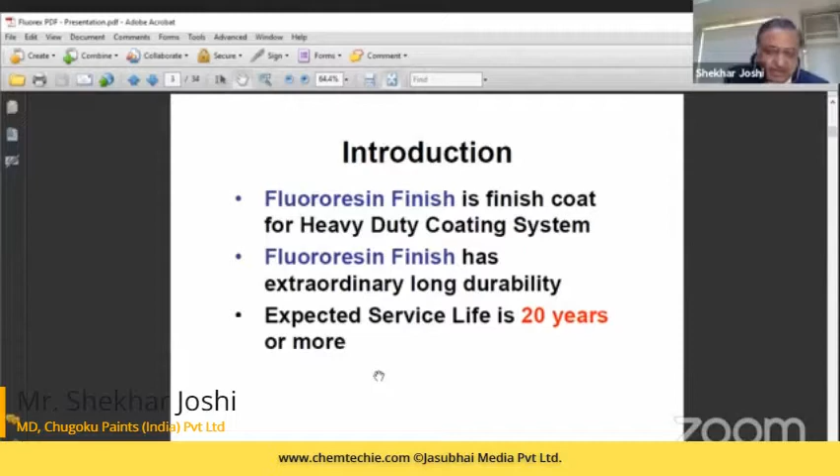So the fluororesin paint system is quite defined, and also quite different from the polysiloxane system, which can have a life of around, I can say, 10 to 12 years, whereas we can expect a life in fluororesin paint finish of around 20 or 30 years. So it has extraordinary durability, which is one of the important factors in fluororesin finish. So what is the specialty?

The specialty is excellent durability, physically very strong, decontamination property, and good application. It's very easy to apply, because you can apply by brush or by normal airless spray. There are no issues as far as painting application is concerned. We may feel this kind of system can be a difficult one, but it's not at all.

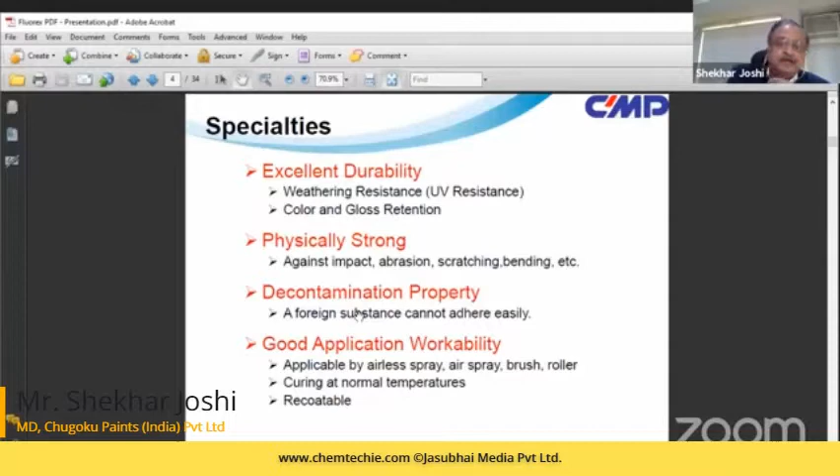And excellent durability is basically this: all the paints, say the epoxy paints, get chalky, while polyurethane paint has its own limitation of life. But here, if you see the FEVE resin, that is fluoroethylene vinyl ether resin, it is basically a resin which UV rays cannot penetrate to the substrate.

All these documents and pictures I'm showing are also available on Google, and we have picked them up from there; it is not something created by Shekhar Joshi only. Let me give my background. I am not from the chemistry side, I am from the finance side, and due to Mr. KL Batra, sir, I came into sales and now sell marine paints and industrial paints.

So if you ask me any question on chemistry, I'm very sorry, I can just get it in writing and then come back to you. But if you ask me anything different, yes, I can answer, but not on the chemistry part. So let me be very clear at the beginning of the presentation.

So this is basically what we're talking about, the fluoroethylene vinyl ether resin, that is called FEVE resin, which, as in the picture, UV rays cannot penetrate because of its kJ/mol. Because the bond which is there is around 424 kJ/mol, whereas the UV rays are around 411 kJ/mol.

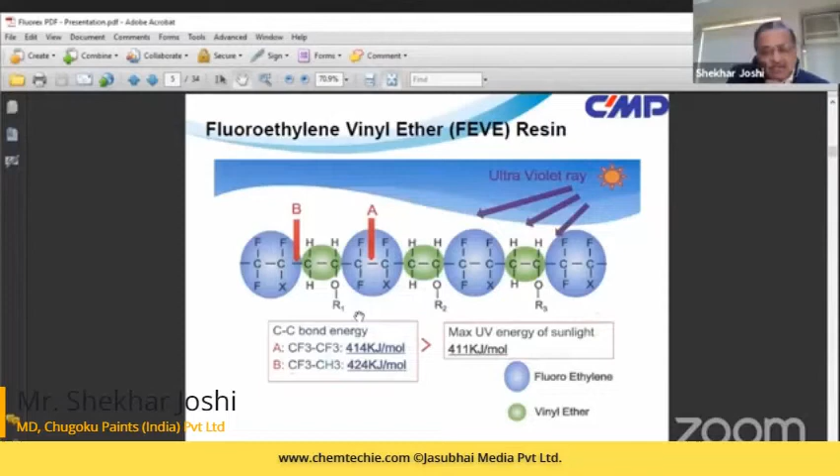Structure formula. This is the structure formula of the FEVE resin, which is a combination of fluorine and carbon. Basically, the fluorine and carbon bond becomes so tough that UV rays cannot penetrate it, and that is how we showed you in an earlier slide how the fluororesin finish paints can be different due to durability, solubility, and also cross-linking ability and adhesiveness.

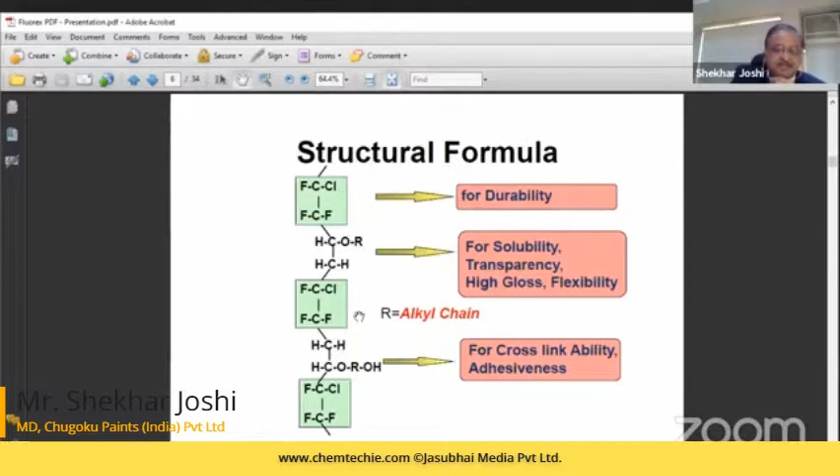So this makes the product different from the epoxy resin, polysiloxane and polyurethane finish. So that makes the product different, and it can enhance the life of the assets at the same time. So our product name is Fluorex, the fluororesin finish paint is called Fluorex.

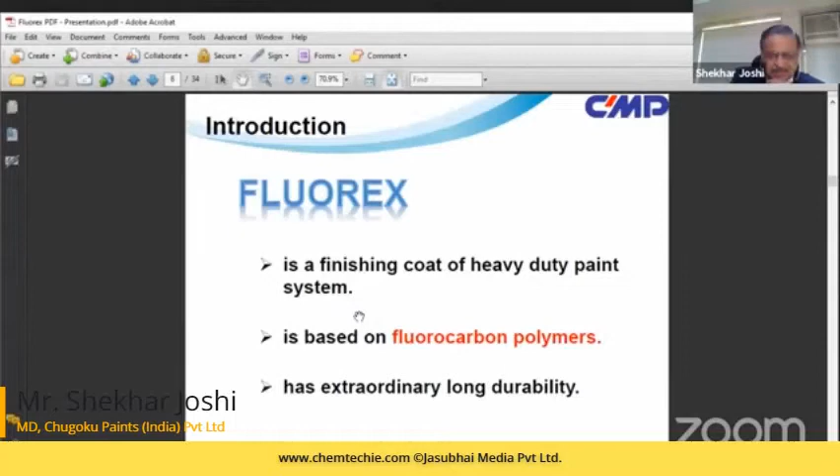It's the finishing coat of a heavy duty paint system, and we'll give you the paint system later in the presentation. It is based on fluorocarbon polymer, and it has extraordinarily long durability. We can show you some examples at a later stage which can substantiate what we are trying to say here.

So let's go to the track record of fluororesin finish. This is the first bridge which Chugoku painted, in 1986 in Hiroshima province. It's called Tokiwa Bridge in Hiroshima province, which is an inland area, you can say. And this is the bridge after 30 years. What you see on the right hand screen is after 30 years.

And we also have data which substantiates the gloss retention, done by various agencies in Japan. It is almost 100% gloss retention after the period of 30 years. So just believe it, because it is the first bridge painted and it's never been painted again.

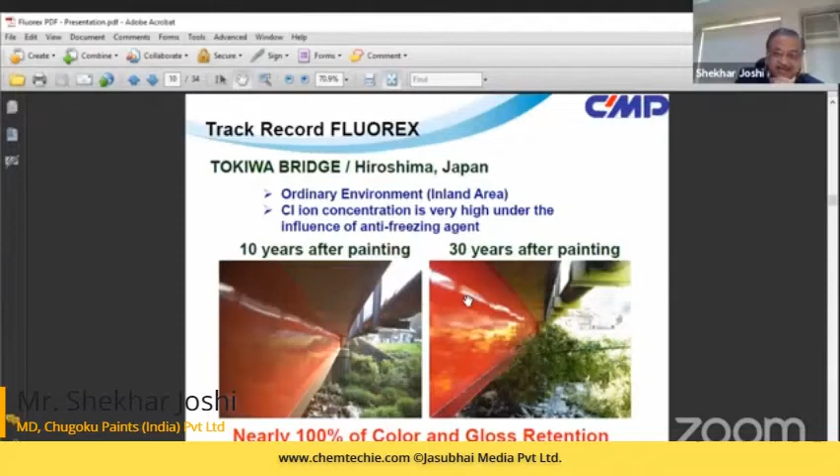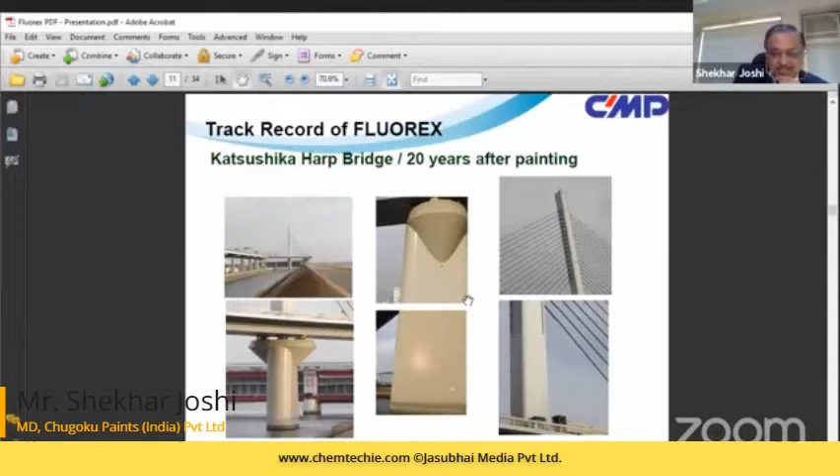Subsequently, Chugoku painted a number of bridges in countries like Japan, China, Vietnam, Hong Kong. Many steel structures we have painted, and this is not only for bridges, it can go for any steel structure which has its life. So this is one more bridge. I can show you this bridge. Then one more bridge we can show you. These are some of the bridge structures after 20 years of time.

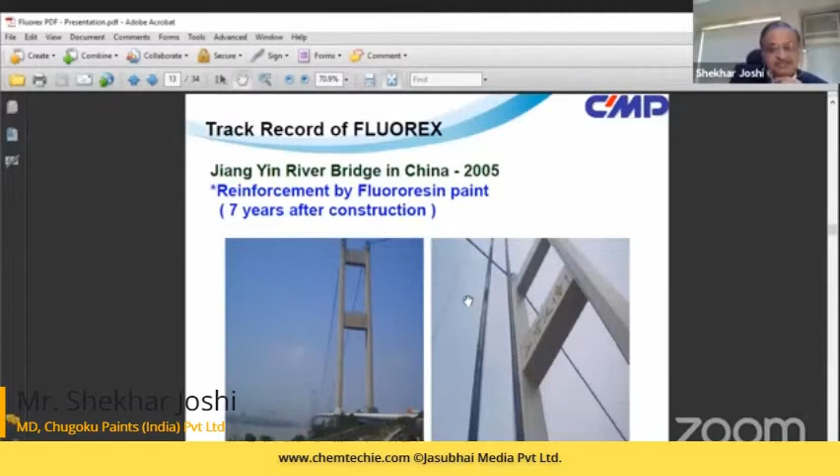Then some of the bridges in China. China has extraordinary infrastructure, as we know well. And these are the bridges in Shanghai, at the construction stage. This is Nanjing. This is a bridge in Hiroshima. It's the airport access bridge, taken at construction time. It is the arch bridge.

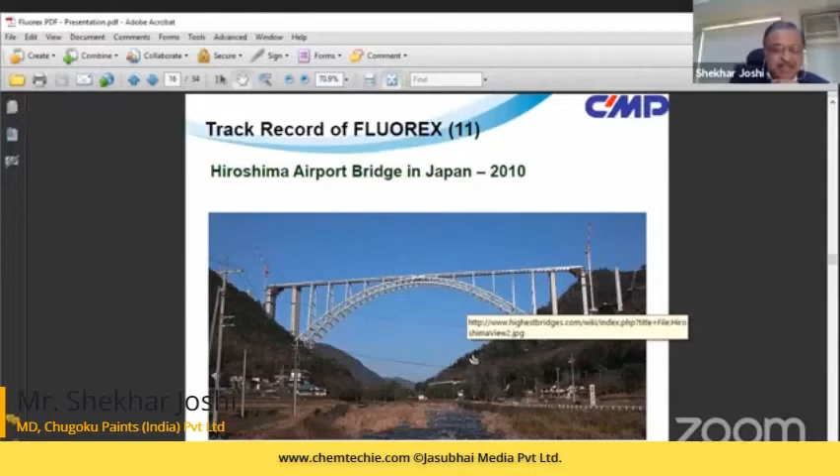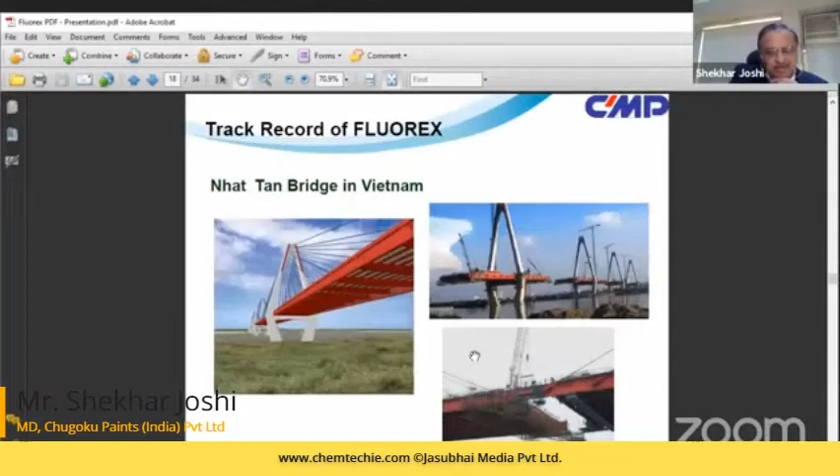It's the same as the bridge we have here on the Chenab River, which we see nowadays, built by Afcons and KRCL. It's exactly the same as the Hiroshima airport access bridge, which was built in Japan in 2010. There are some like Hong Kong Jockey Club, and this was the last bridge we painted in Vietnam, completed in I think 2013, in Hanoi. So there are some more structures.

Let's go back. So what is the data of fluororesin finish? If you see the accelerated weathering test on a gloss retention basis, the fluororesin finish, in red color, is just parallel to the x-axis, and all other categories like epoxy are coming down, polyurethane coming down, then polysiloxane is coming like this. So the gloss retention on the QUV tester remains for 2,500 hours. So this is one of the most successful products which has come out as a finish paint for any steel structure.

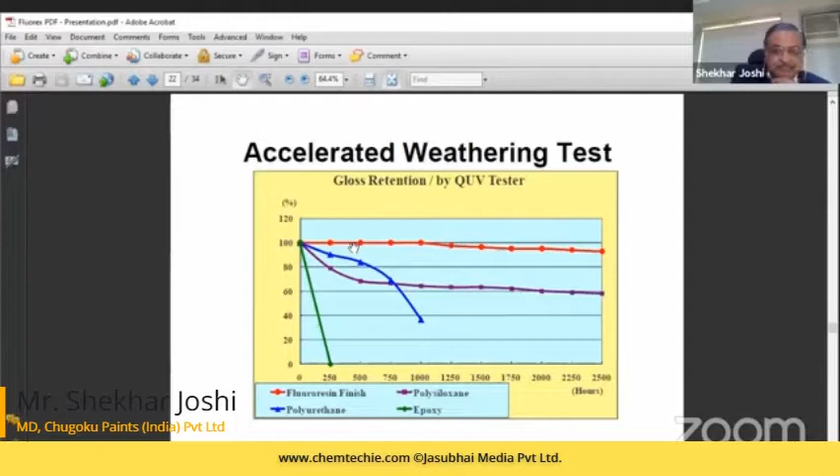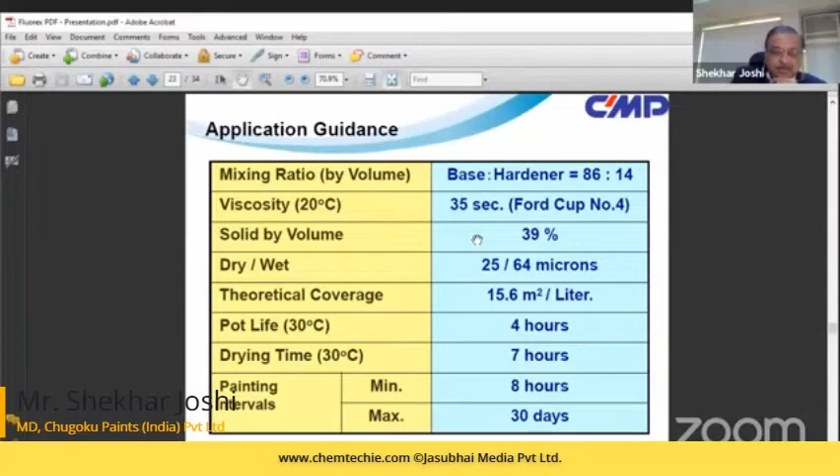So this is the application guide I'm showing you on the screen. If you see the viscosity and solid volume, yes, it doesn't come under green coating technology, but it is used only once in the life of the asset. So that is why I selected this topic for this kind of presentation, and just wanted to bring it to your forum. So, chalking test.

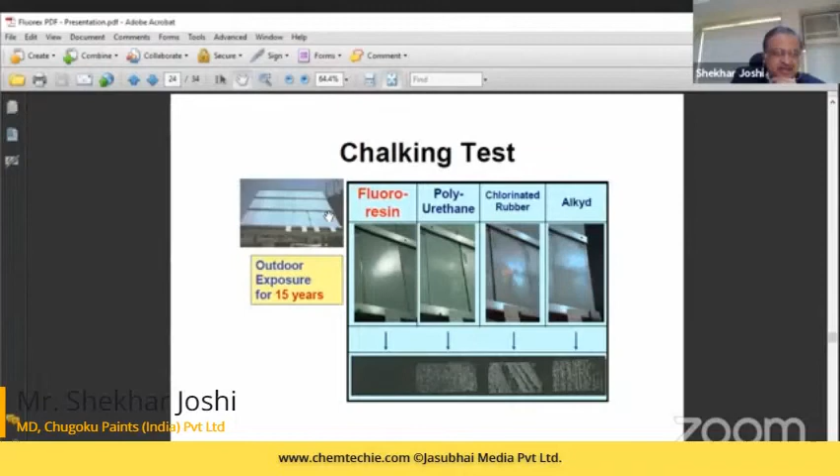This is an outdoor exposure test in Japan for 15 years, because Chugoku is a very product centric company, and whatever product Chugoku brings out in the market is foolproof tested. At the same time we do corrosion tests in Suruga Bay in Japan, which is called one of the most corrosive places in the world. And all the tests we carry out, whether in marine coating or heavy duty coating, have been tested in these places. So you can see the chalking test that's been done.

So what is this? Japan Road Association. Japan Road Association has given the guidelines, and what we're talking about, C5, has nothing to do with ISO 12944. Japan has its own way of working, and they have C1 to C5 classification for the coatings, and C5 has been classified as a fluororesin finish paint system with a zinc silicate base paint.

Now, zinc silicate base paint, which contains around 82 to 88% zinc content in dry film, with 75 microns, followed by the epoxy resin paint with a mist coat, because the porosity has to be filled up. So it has to be a mist coat. We can apply it wet on wet, we can say. Then undercoat with 120 microns, that is also again the epoxy resin paint.

Undercoat of fluororesin finish, because it binds the epoxy resin with the finish paint, and this undercoat plays a very important role, because it has a binding, it is epoxy based, so it binds the fluororesin finish with the epoxy resin paint, which is anti-aggressive.

And the total system is just 250 microns, and it can give a service life of 20 years plus in Indian weather conditions, where the dust is more, the heat temperatures are different, salinity is different, and in those conditions we are talking about 20 to 25 years; it depends on which area you're going to apply these paints. So this is basically the C5 paint system the JRA has specified, and worldwide it has now been accepted by many of the consultants, and at the same time many of these agencies.

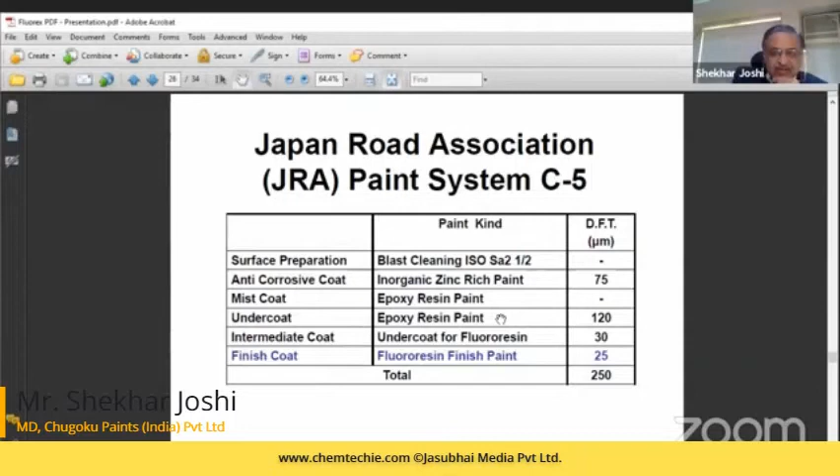So what are the features of the JRA paint system for C5? Finish coat: fluororesin finish has extraordinary weathering resistance. Yes, it is much more extraordinary than the normal paint, we can say. Undercoat epoxy paint to protect from corrosion factors like penetration. Because even if anything goes wrong during the application, the epoxy won't allow anything to happen to the substrate.

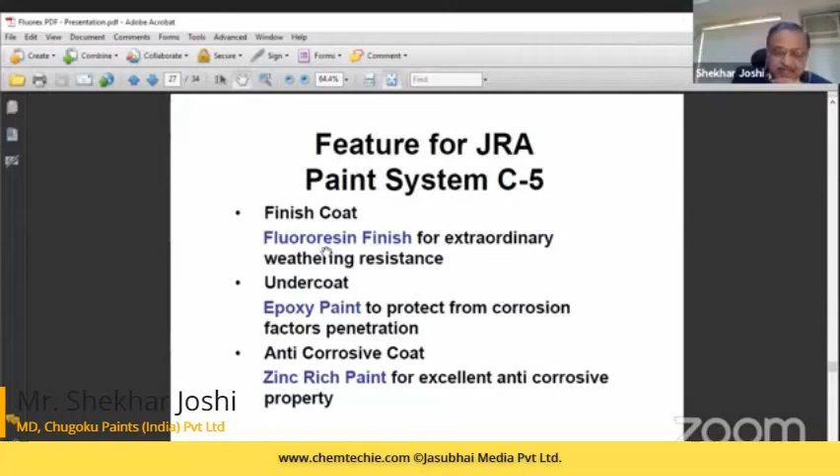At the same time, the zinc rich paint, which is basically the zinc silicate paint we have, has excellent anti-corrosive properties. So the first paint coat is zinc based, that is ethyl silicate zinc paint, followed by the epoxy coat, then fluororesin undercoat, and fluororesin finish coat. So this is the way it goes, and it has performed extremely well.

So what is the expected life? Because we have talked about 20 years, 25 years. What about Japan? Japan talks something different. Can you believe it? Japan talks about around 60 years in an ordinary environment, as per the JPMA. Ordinary environment 60 years, and severe environment 45 years, because that is the applicability and the product they get in Japan.

So even if the application standard in India reduces it to some extent, we can still very well look at around 25 or 30 years. I'm not saying that 45 years will not be possible. Yes, it's possible, but we need to have such an environment, and at the same time such application techniques and stringent inspection techniques, because in this case it's very important to provide 100% inspection throughout the painting process and also throughout the surface preparation.

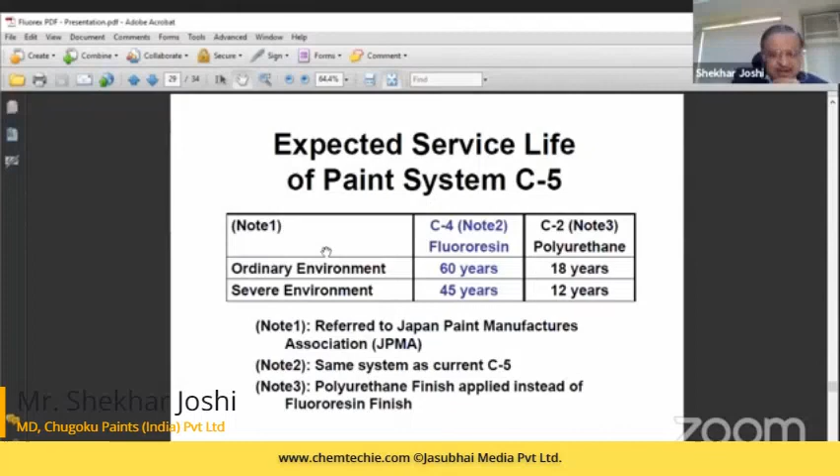That's very important for any owner or customer to look for, because this can secure an asset for a longer time. And this can also benefit you to reduce your cash flow, because there are no operating costs. If you compare the life of the asset and the operating cost incurred with a normal PU resin paint or polysiloxane, this can drastically reduce the cost and enhance your PBT. The return on investment and cost benefit ratios are very high in such systems. And yes, the capital investment is high, but it can get capitalized along with the asset.

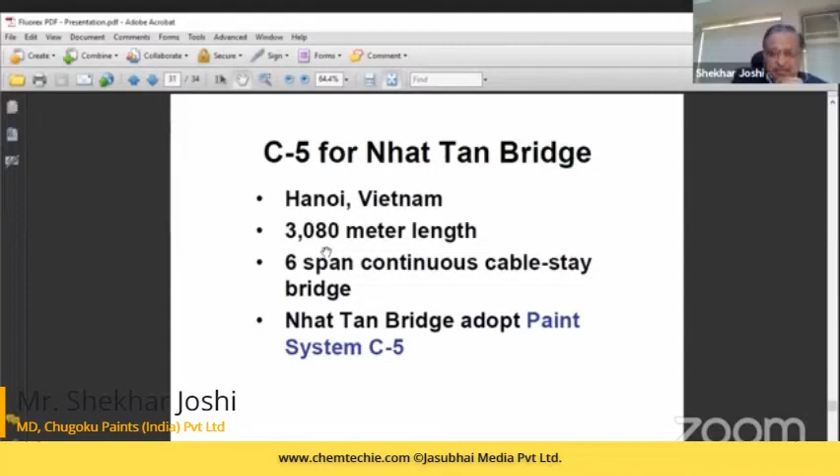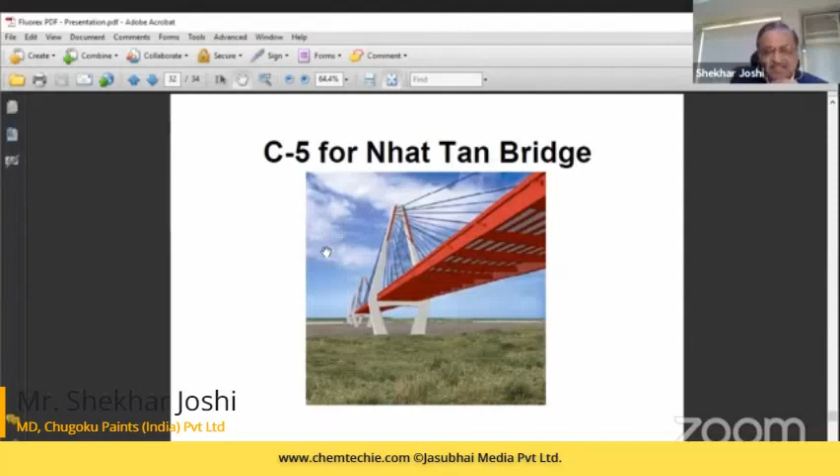So lastly, we have seen many bridge structures. This is the last bridge which we painted in Hanoi, Vietnam, around 3 kilometers, a 6-span continuous cable stayed bridge with a C5 paint system, called the Nhat Tan bridge in Hanoi, Vietnam. So this is the last picture, the full bridge picture. And this was one of the successful projects which Chugoku completed in Vietnam.